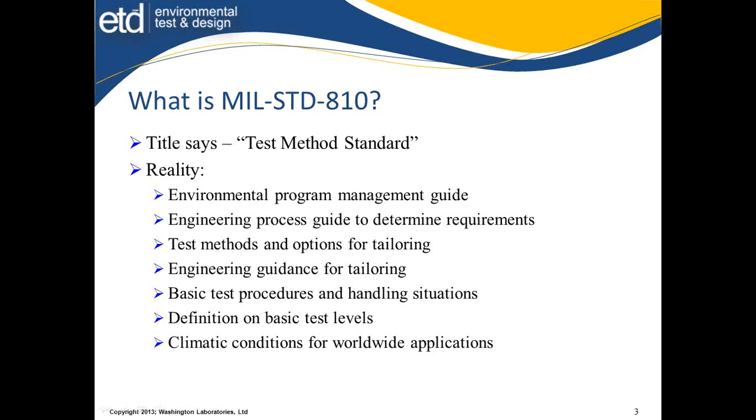The title indicates that it's a test method standard, but the reality is it's much more than that. From a program management guide to the engineering process guide needed desperately to determine the requirements, the test methods and options for tailoring, the engineering guidance, the basic test procedures and handling situations. What do we do about various things that arise during tests? The definition provided on basic test levels, and there is a guide on climatic conditions to help the developer understand what his program should do.

The environmental tasks in Part 1 are specified. Task 401 means the engineering and management plan. Develop the process - what's going to happen here, where's the life cycle, what is the overall requirements for developing a product and getting it to where it will endure the hardships of the military cycle.

The life cycle environmental profile obtains data where this is going to be. Helps us decide which tests are appropriate, without over-testing or under-testing or simply testing for the purposes of it. The life cycle plan is critical to getting product development correct.

The operational environment documentation gives a history of where this thing needs to be, what needs to happen, and that supports our environmental issues and criteria list, where the program developer decides what is appropriate - what do we need to test, what do we need to analyze, what do we need to ignore, what's associated with that.

That sponsors the detailed environmental test plan. This is the item that tells all the test labs, all the test people, what they should be doing - what limits, what profiles, what fluids, what everything should be done associated with this. This is typically one of the most lacking pieces that we get. The test lab will be asked to develop the criteria with no life cycle plan or none of the information feeding it. The standard's pretty specific about not doing things unnecessarily.

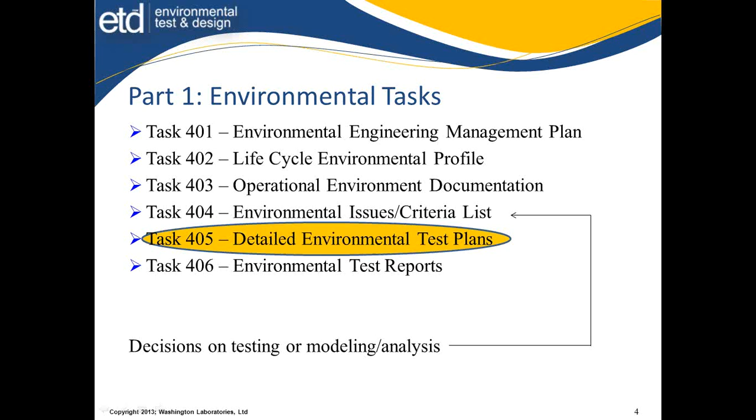There's several test methods in Mil Standard 810, as you can see by the list, from low pressure to multi-exciter and mechanical vibration for shipboard. A lot of these tests have been around for a long time, and associated with those tests, you'll have a decimal place like 500.6 or 500.5, depending on which Mil Standard revision was associated. So the decimal place helps us decide which one's in play.

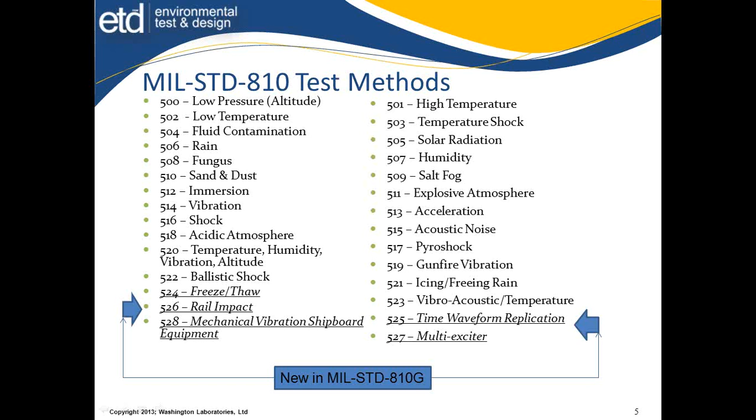We'll be going through each of these, at least a little bit, and getting an overview. As you can see down here, 5 new requirements were added to the 810G. I've identified those in italics, so you'll be able to see those as we progress through this.

Other standards come into play quite frequently: the 60068 series for the IEC, International Electrotechnical Commission; Mil Standard 883 for microcircuits; 202 for components; DO-160 has a program for commercial aircraft; and Mil Standard 167 deals with mechanical shipboard, internal and external.

But in each of these documents there's a common theme: tailoring and life cycle considerations. This always feeds through to get the right thing done, whether it be a longer endurance test or a shorter test to get a snapshot of what's going on. All of these define qualification testing. There's also attributes associated with development to help us decide how to design the product, get sample pieces, packaging material developed - things of this nature to help develop the overall program.

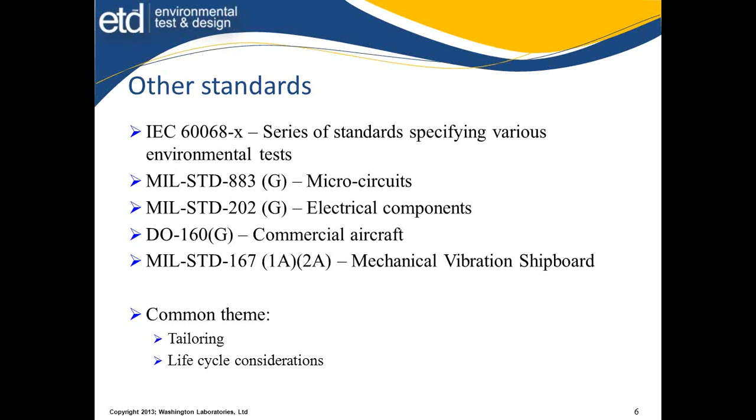Tailoring is a common theme, and we use it almost every time, whether we know it or not. The tailoring helps us develop a program based on common sense considerations, the material, applications. What are we trying to prove? What are we trying to satisfy here?

The details of the evaluation process and the method details - exactly how to proceed, what categories and extreme conditions could be encountered and how we should apply those. Obviously, there's many test methods in here and lots of options under each of the test methods, so we need to consider those kinds of aspects.

Any special conditions that would be involved. How do we configure the unit? How do we expose it? Is it a package test? Various things come into this overall tailoring process.

And a sequence - several selected methods are defined, but you need to use engineering judgment if not defined. What will happen? Here's always a problem I run into: once you tailor it, how do you get it accepted? That needs to be driven from the contract down to the testing lab versus the opposite direction. We seldom see that, but we need to see more of it, be more interactive with our customers, develop things appropriately, and they go into the acceptance of this.

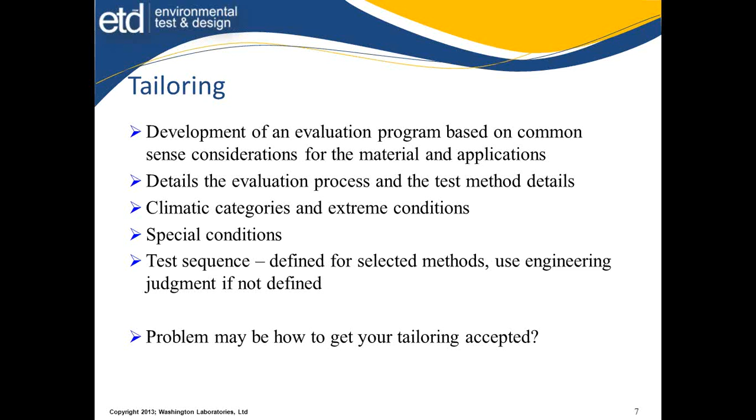A lot of contract officers and technical representatives think we're trying to shortchange the process, so they tend to be difficult to accept with tailoring. So your tailoring process needs to justify, rationalize why we're doing what we're doing versus some other method. When the specifics are not clearly defined, this becomes even more useful.

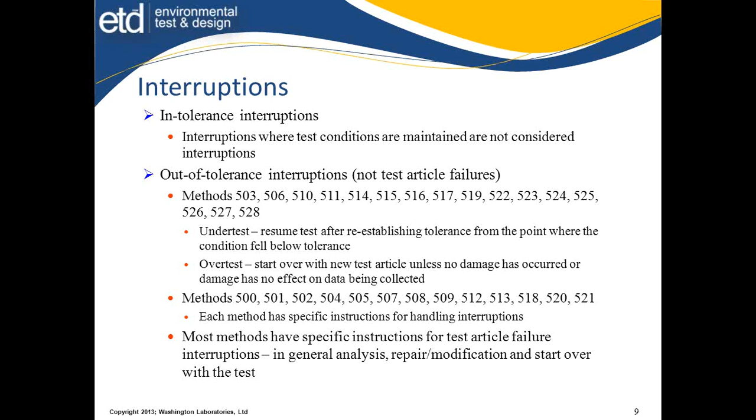If some prior test could have contributed to the failure, for instance, a thermal test may have caused an expansion, so the immersion test caused a leak. Redoing the leak test with a new product without the thermal expansion and contraction cycle may not be adequate to determine what you need to do here to repair it. You may not have a compliant article because of some other feature. So we'll make sense out of this and look at contributing factors. Analyzing why it failed is always a necessity.

Let's get into the various methods here. Method 500, low pressure, or commonly called altitude. Evaluate material that's transported or exposed to rapid or explosive decompression, carried externally, stored or used at high ground elevations. Determine which procedure needs to happen in your tailoring.

There's various procedures for the operational, transport, and exposure for rapid decompression. How fast does the change need to be? Rapid decompression could indicate various things. Usually the test duration is about an hour, but sometimes tailoring calls for longer durations for things that could be affected. What kind of test configuration do you have? Is it a shipping thing, an operating thing? What are you going to do here?

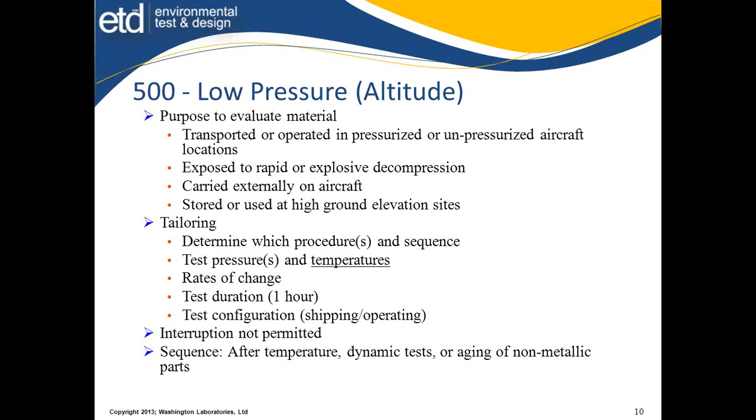So the tailoring needs to specify all these various conditions. In this case, an interruption is not permitted. The sequence should be after a temperature cycle, dynamic tests such as vibration, or the aging of non-metallic parts. Glass delamination can happen, things of this nature.

High temperature testing: evaluate surface stability, overheating, mechanical binding, failure, etc. Shortened life, you have all kinds of things that temperatures, especially high temperatures, cause. Procedures need to define for storage and operating, or they are specified for storage and operating.

And the tailoring is based on your climatic zone. Where is this deployment going to happen? Is it a hot, humid environment, a hot, dry environment, extremely cold? The test durations are defined, and you need to specify whether it's a constant or cyclic program. Most of the standard calls for some sort of cyclic program. However, constant temperature exposure at a fixed level is sometimes substituted as an operation or storage configuration, or some of both.

In a lot of cases, storage configuration is an extended period that calls for some operational checks during the period. However, storage configuration could be inside a container that prevents you from doing that. So we have to really look at how that examination happens.

Something needs to consider stabilization. How long does it take the item to get to a temperature? If there is a huge mass of material, it takes quite some time to change the temperature. So we need to consider stabilization. Most of the durations call for stabilization plus the exposure period. And again, humidity could be called out, especially if it's extremely low - humidity can affect the operation.

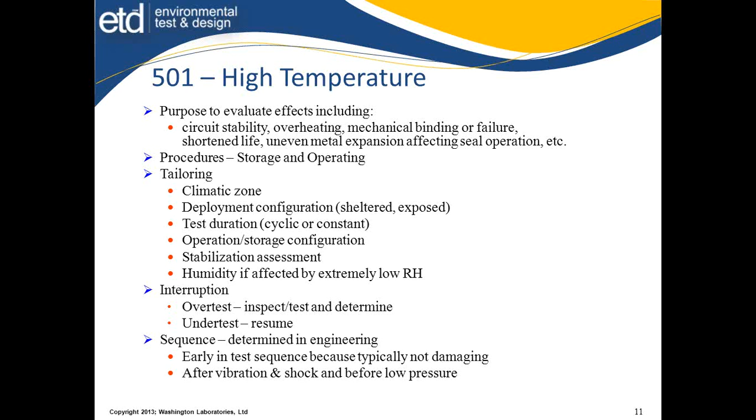Low temperature testing: again, the same kind of items happen here - performance and binding, etc., shortened life, and uneven expansion. Freezing and condensation could come into play, but there is a freeze-thaw system been added to the standard. Procedures call for storage, operating, manipulation, just like the high temperature - the climatic zone, the deployment, whether it's sheltered, exposed, durations.

And normally a constant exposure is dealt with on this particular item, whether it's operational or storage, and again, stabilization, much like before. This manipulation thing could come into play because if you have to operate switches, buttons, latches, etc., while it's extremely cold, you may need a chamber where a person can enter and wear cold weather gloves, etc., to verify they can operate. So selection of where you do the test is a function of this manipulation requirement.

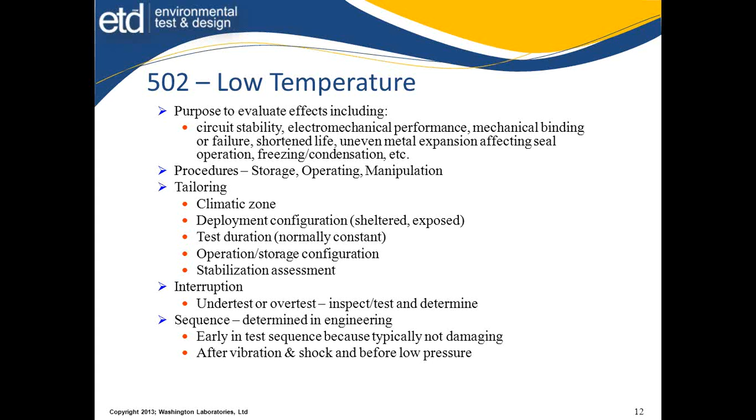Sequence is determined, but early in the test sequence is usually the case, again, after vibration shock and before altitude.

Temperature shock. Purpose, effect, sudden change. How fast is a shock? Well, if you think about items that go from a warehouse that's heated or a maintenance shop where you take items out and install on an aircraft in a cold weather climate, you can get an extreme shock at a very rapid pace.

How long to expose the item and how many shocks? Do I leave it at the temperature till it stabilizes? Usually that's the case, you need a stabilization period. But the transfer time, do we need to switch it in 1 minute, or is it just a rapid change like 10 to 15 degrees per minute? So it could be either way.

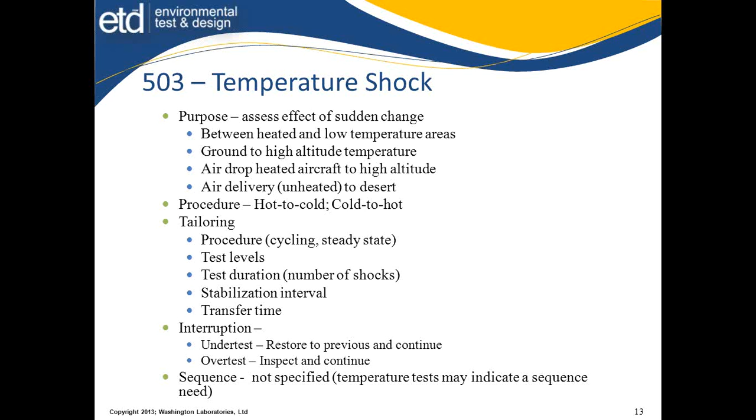Interruption of the test, restore the previous conditioning, continue the test, and you inspect it before you continue. Obviously, if the inspection is not valid, you need to worry about it. The sequence isn't specified, but normally the temperature tests indicate a sequence need. If you have cold issues or hot issues, you may need to look at that being a party to this job.

Fluid contamination. Obviously, this is the one that causes most labs the most grief because we've got to handle fluids that are not necessarily nice to handle. They have corrosions, etc., and we have to be able to dispose of those materials, etc. This also has some various procedures where you dip the item into it, spray, immerse it.

What fluids are applicable? It's almost insane when somebody says, well, the whole list, because you're talking about an extreme amount of fluids, an extreme amount of time, and the duration for these things, plus handling all those fluids. It's obviously there, but if it's never going to be exposed, why would anyone select to do these things? So we need to look at the application to make sure we're choosing the right methods, or else we severely over-test and expose products, and it's not an inexpensive proposition.

The application method needs to be determined whether it's sequential or multiple fluids exposed at the same time. Any sequence, you need to clean it between the fluids, things like that. Which sequence do we operate them in? These need to come out of that life cycle and or criteria development thing where that procedure, that plan defines what we're doing here.

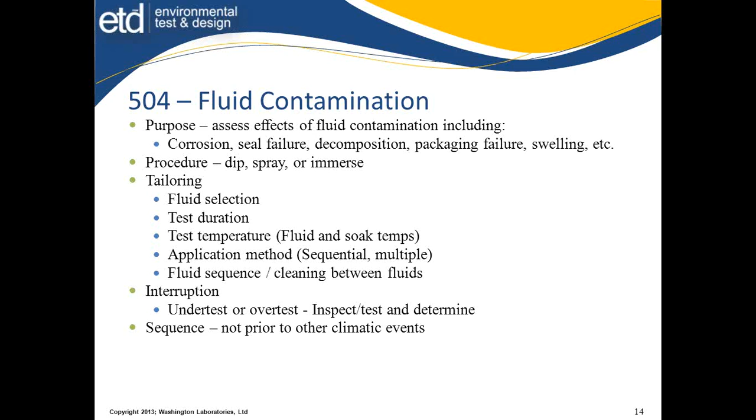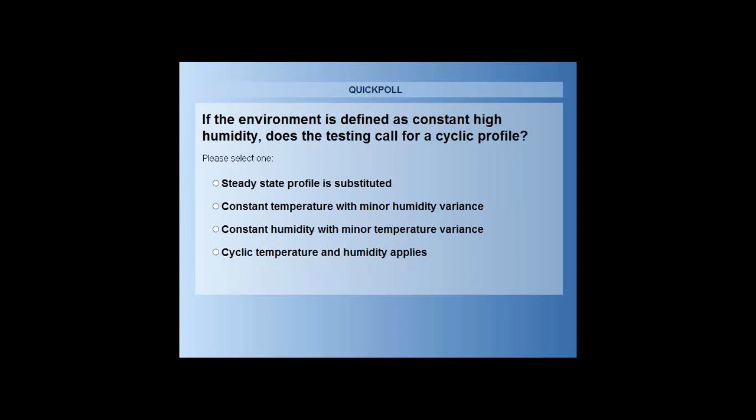Well, let me go back to that poll question. It's a good thing. It is cyclic temperature, and with a constant humidity is the normal call-out. But remember, when you're changing temperatures, you will get a variance in the humidity profile, and that's normally allowed.

So let us continue. The rain test of things outdoors encounter rain quite often, or sometimes we think it's raining inside when the humidity climbs sky high. The performance and effectiveness seals, covers, packaging, any water removal system.

If there is rain or blowing rain, water tightness or drip test applies. These could go from a high exposure with high wind rates to a dripping system, and an immersion could be included in this, though usually it's a separate immersion test. Some people feel they need to expose it totally, and immersion is the way to go.

The tailoring has to specify various things here: the rate, drop size, velocity, pressures, orientations, durations, temperatures. These have to be determined for how we're going to do the test. In the absence of this information, the standard doesn't really give good ideas, other than stating a typical drop size, and we usually go that way absent any tailoring information.

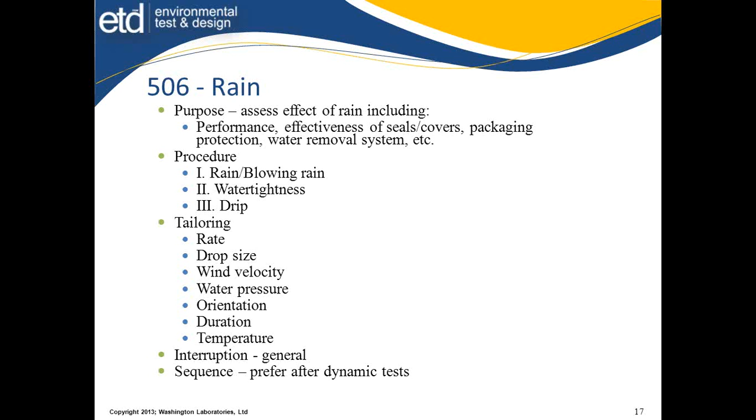The general interruption happens much like anything else: under test, resume it; over test, inspect it, and decide whether you're going forward with that article or not. The sequence preference is after dynamic test, to see if we've shaken open holes, things became loose, etc.

Humidity exposure purpose is warm humidity environment, corrosion deposits, delamination, fogging, you name it that could go wrong. The temperature and humidity needs to be specified, with 5 48-hour cycles as the normal, so 10 days of exposure. Inspection intervals could occur during the process, usually at cycle 5 and cycle 10, but others could be used.

We had a program recently that had an evaluation every day. Operation periods and performance checks: some aggravated cycle calls for these checks at the 5th and 10th. Interruption: the under test resumes from the end of the last completed cycle. Over test: inspect, test, and determine whether to go forward or not.

The sequence should consider the effects on subsequent tests, but do not do this one after the salt fog, sand and dust, or fungus testing, as they will affect the results of these items.

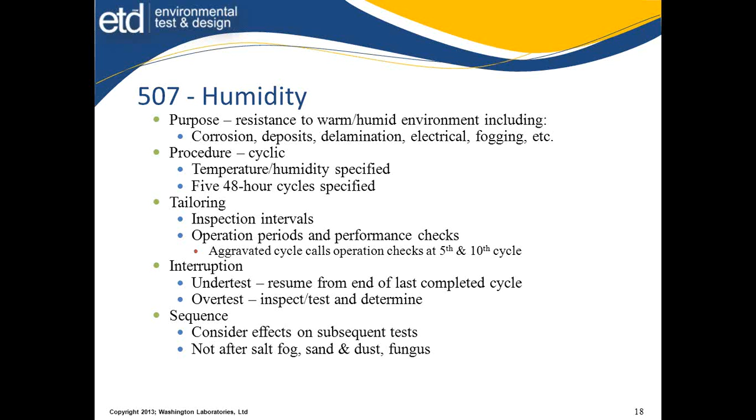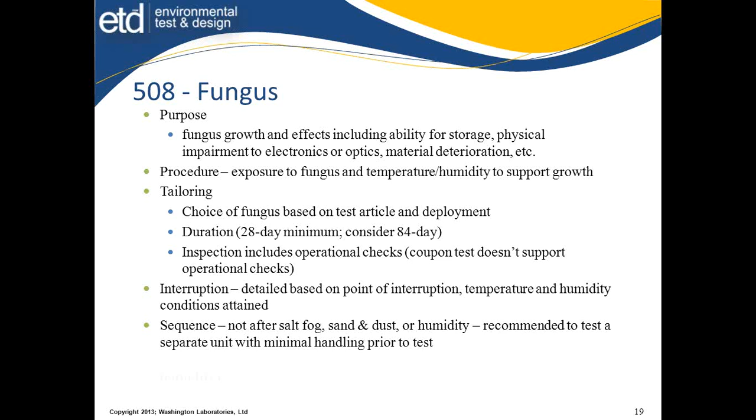The salt fog test happens for a lot of the shipboard activities and things near coastal regions. The procedure calls for alternate fogging and drying cycles.

Tailoring: do you really need to do the test? That's been one of the common questions. The standard calls for 48-hour exposure followed by 48 hours of drying. However, the more realistic test calls for a 24-hour exposure, then 24 hours of drying, with 2 exposures alternating. That's what most people call for, though the standard still says 48 hours exposure with 48 hours of drying.

The temperatures, the salt fog fallout rate, and storage conditions need to be defined if different from the standard. These tests are pretty well commonly known and straightforward, so there's not a lot of tailoring other than high exposure times. Under test or over test, inspect and determine whether to proceed or not. Sequence is not specified in its effects, but assess the effects of other tests, especially after fungus and humidity.

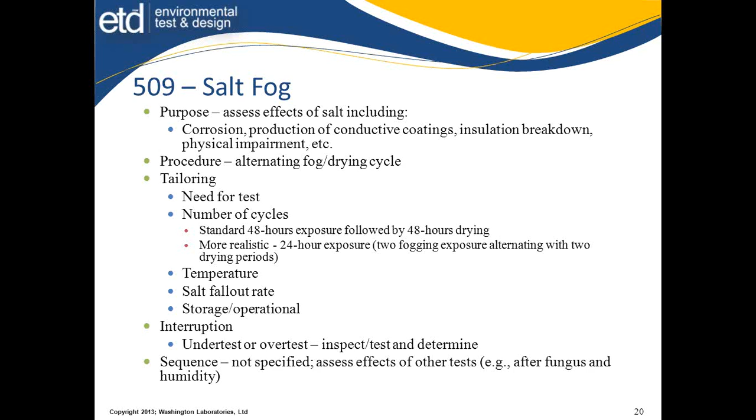These tests call for an in-depth inspection, so taking the unit apart and seeing if we've had salt penetrate into the unit, etc., is part of the overall job. So when considering how long you're going to take to do this, consider that inspection could be somewhat lengthy.

You also have the test article configuration that has to be defined, temperature, humidity. The duration is typically a dust is 6 hours plus 6 hours of an elevated temperature, and the sand is 6 hours. You may have exposed sides, so the orientation could come into play here.

You need to operate during test. It's always a challenge to operate a generator, for instance, during the sand exposure, and you're pulling in air with the sand, and it tends to clog everything up. But the filters may need to be reestablished and continue. Over test, remove the excess, and resume.

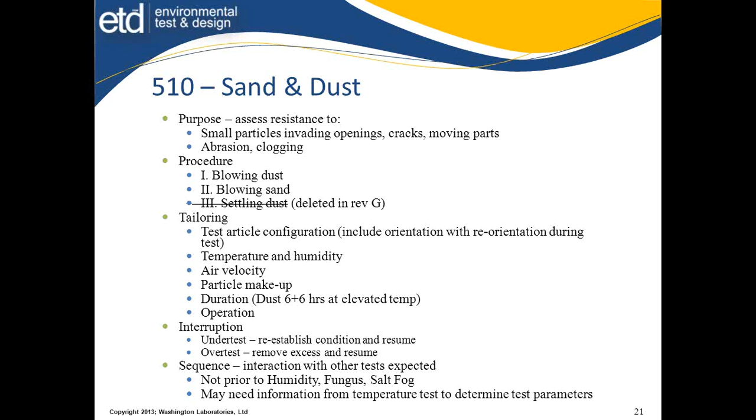Sequence interaction with other tests are expected, so not prior to humidity, fungus, or salt. You may need some information from temperature testing to determine some parameters. So this is one of those that you may have to get a result on one test before you decide how to do the next test. This is one of those.

Explosive atmosphere. Purpose is to test ability to operate without ignition of fuel air atmosphere. The tailoring is applicable. What's the fuel vapor mixture, any temperatures? Does the item get hot to ignite the mixture, or is it simply from arcs from unsealed switches and contacts that may change?

Humidity needs to be determined. The altitude, a max of 40,000 feet. Just today, we had a client specify 52,000 feet altitude. There's no air there to make this mixture happen. You're not going to support flame and ignition.

So how do we call for it? Interruption, you purge your chamber and reinitiate the test and basically start all over again. And you need to perform temperature and vibration shock tests first, because that may expose cracks and openings that would allow the mixture to ignite.

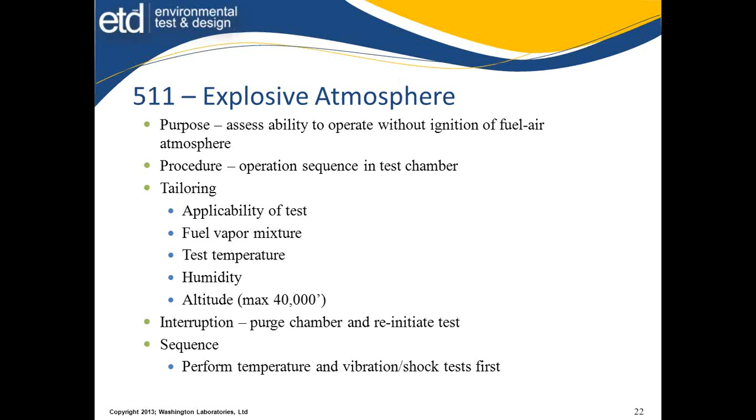Immersion. The purpose is to look at electrical impairment, corrosion, explosive deterioration, engine operation, etc., associated with immersion or fording. Some things need to be underwater for a period of time, others are like stream fording. The depth of the immersion for fording or fording conditions need to be defined.

Typically, a 1 meter depth is called out for a lot of products for general applications, but some things call for operation at various depths. A 20 meter immersion is not out of the question. They may need to operate at 20 meters immersion, so that's kind of a difficult test to get a dunk tube at 20 meters tall. Most of the time we go to some sort of lakes or things like that.

Test configuration is packaged, operational, or protected, and the duration, typically a 30-minute immersion. This preconditioned temperature a lot of times calls for you to elevate the temperature of the article 10 degrees above the water temperature prior to immersion. So it gives a chance for the sudden cooling and pulling in of the water or the moisture.

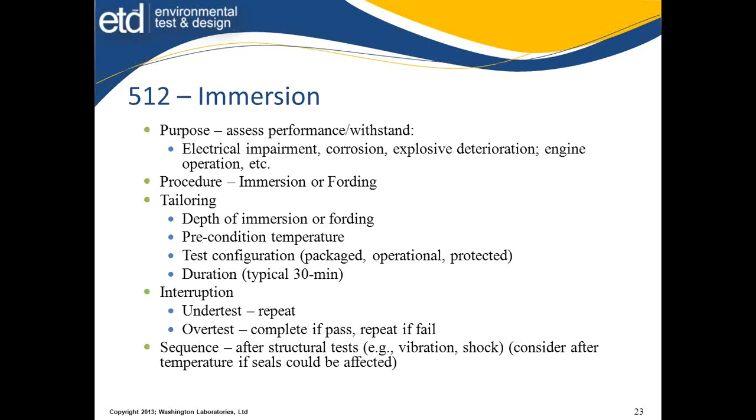After structural test, vibration and shock is a sequence. Consider after temperature if any seals could be affected.

Acceleration. Purpose is to perform, withstand the inertia associated with acceleration and deceleration and maneuver forces. Structural, operational, crash safety. The tailoring gets to be defined for applicable procedures, the levels, orientation requirements, etc.

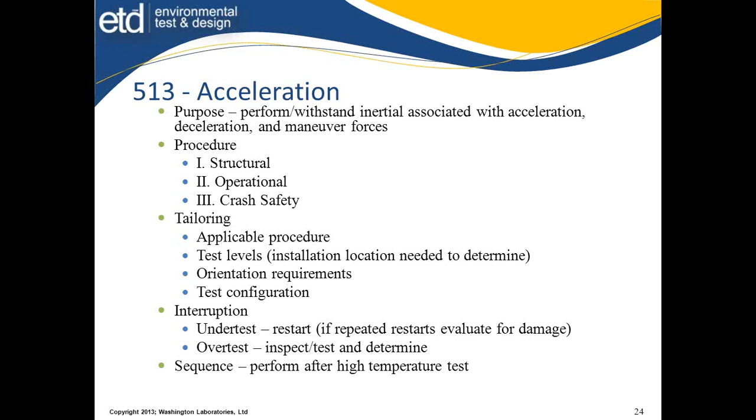Crash safety says that I absolutely have to have the mounting structure as it would be installed, or else I don't evaluate its ability to hold on to that structure or the structure to retain it in case of a crash event. And an under test is restarted and inspected if you over test. After high temperature tests is the most common place to put this thing.

Vibration. The procedures are big. There's 4 general procedures associated with vibration. However, there's 25 categories to select from and 8 type tests such as development, functional, qualification, etc. Vibration characterization, the article configuration.

How are you going to mount this thing? Are you trying to look at how it stays together? Or are there going to be fixture adaptations that says I'm going to dampen the vibration? So doing a test on a box that you clamp to a table, the shaker, is not necessarily evaluating its mounting structure or what happens.

You could get a significant profile variance on the item inside because you don't mount it on a structure that would provide a resonance or a dampening of the vibration. So sometimes a clamp down method is artificial, but it's used commonly to evaluate what goes inside in what they consider to be a worst case event. However, it may not define that if I've got mounting that causes a resonance at a frequency because of the mounting structure.

This requires a lot of detail on configuring the test article and the tailoring. How is it going to be evaluated? What's the purpose, under test, over test, pretty well defined. Resume where you fixed it.

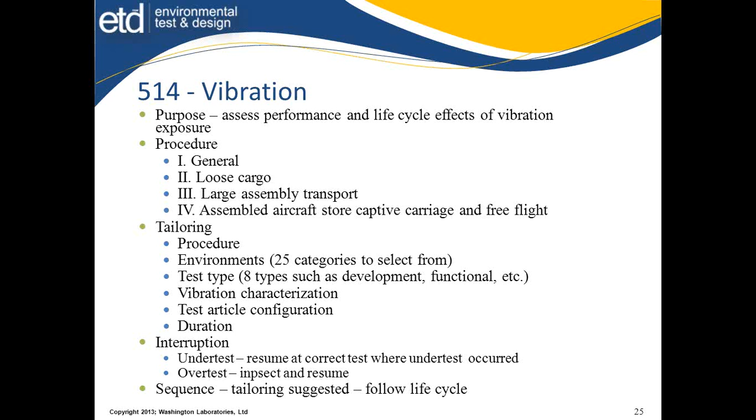Tailoring is suggested, but generally follow the life cycle. Vibration is a tailoring process. It's not common, but I had one product that had been qualified using the wrong profile, and when we put the right profile in it, the metal seams of the chassis broke apart because of the propeller frequency of an aircraft.

So we need to look at really tailoring this thing and look at its environment. Acoustic noise comes into play for limited applications where you get high noise hitting the test article. Grazing incidence, some acoustic noise, the diffused field, cavity resonances could occur. Again, applicable procedure if it's appropriate. You need this life cycle plan to identify it, if it's not going there.

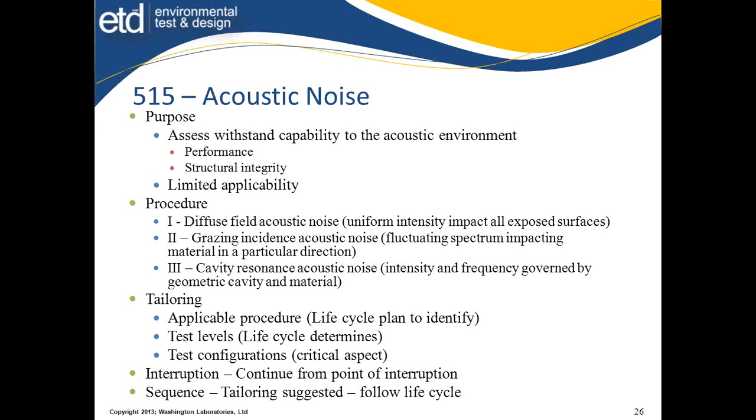8 procedures, and it excludes some things here that we touch on with other things. It does include drop testing. This always frustrates a lot of people getting their product qualified because we're going to drop it on solid surfaces and damage it. They don't like to see the thing damaged during tests, but that's the typical way to get the evaluation.

Sometimes procedures call for going on a shaker table, and is it a waveform that's a sawtooth, a half sine, a trapezoid? How long is the duration of the pulse? Shock also gets into some time waveform replication, a new standard that was added, and we'll get to that as we go towards the end.

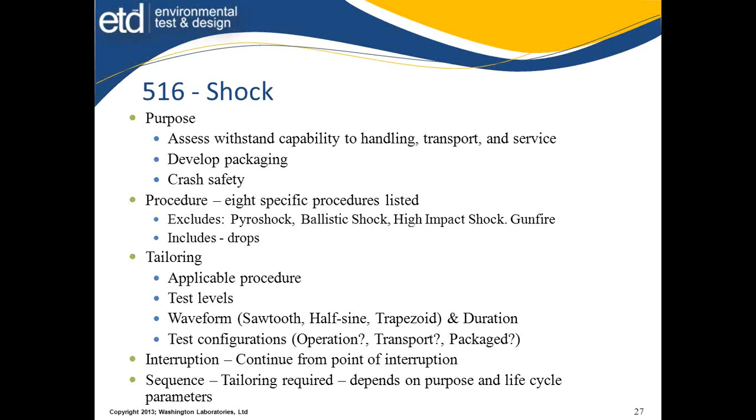Interruption is continued from the point of interruption. Sequence tailoring is required, depends on the purpose, life cycle parameters. And you're seeing a trend here also, life cycle parameters come into play more frequently than we like to admit. Pyroshock, detonation from pyrotechnic devices, mounting structures for explosive ordnance, things of this nature.

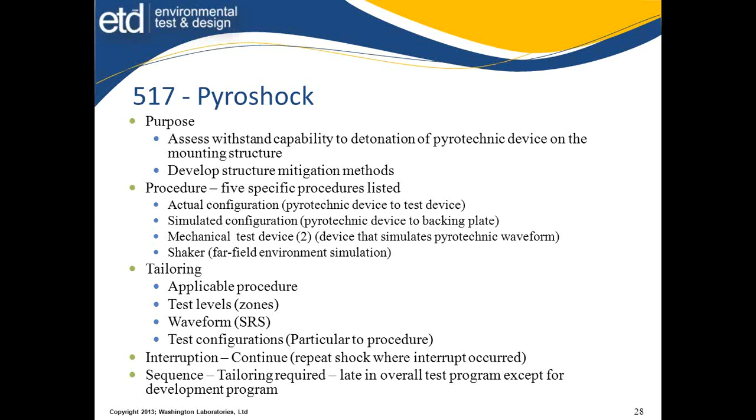5 specific methods are listed and they're stated there. Again, the tailoring is really critical. Applicable procedural levels, what zones are you in? What's the shock response spectrum on the waveform? The test configuration is usually particular to the procedure. You need to follow the procedure, the configuration of the actual event, to be able to tailor this shock event correctly. Tailoring is required. It's usually late in the overall program unless you're developing the structure.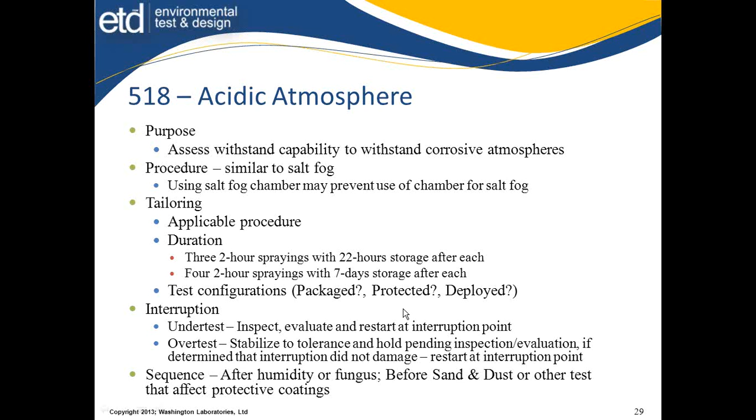Test configuration, got to define what's going on there. Interruption, inspect and evaluate in all cases. Overtest, stabilize it and hold it pending evaluation. Determine interruption, do not damage it, restart where you did. After humidity or fungus, before sand and dust, or anything else that affects the protective coatings.

Gunfire shock, those things that are placed on automatic weapons or nearby them where the shock of the explosion or weapon causes issues. Again, sometimes this reproduction of a measured time trace, the method 525, comes into play. Stochastically generated measured time trace information or predicted input.

Tailoring, the applicable procedures, any control options, how are we going to control the shock event and feedback from that. Where do we place an accelerometer to get a control point that we're going to accept that it's at the right level? The test levels are usually location determined based on the installation, so we don't know how to do the test level without guidance. The test duration is calculated based on the life cycle and any configurations. Again, the fixture becomes critical to determine how this affects things.

Interruption, reinitiate from the test being conducted. Component failure, replace it and start all over. Sequence is tailoring suggested with guidance, but generally after vibration and shock and before climatic tests.

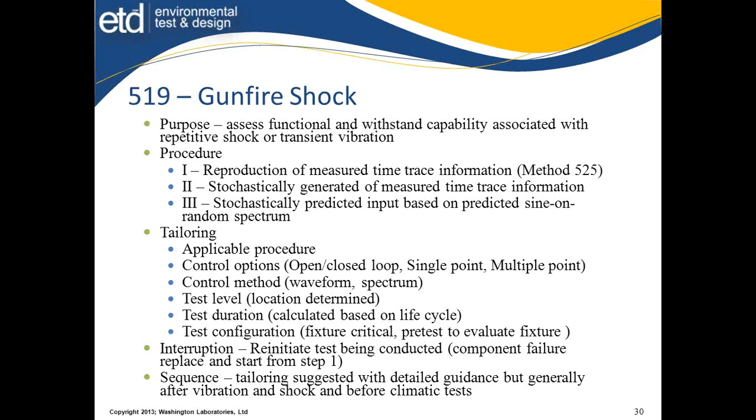Temperature, humidity, vibe, and altitude. People look at this as all things combined, but normally it's some combination of those things, like vibration and temperature, humidity, temperature, altitude, humidity and temperature. And it doesn't replace the individual methods, even though a lot of folks said, why am I doing both? It wasn't intended to replace them. The procedures for engineering development, flight or operational support, any qualification, tailoring, the definition needs to be there. Quite frankly, the most common thing we see is temperature and vibration together.

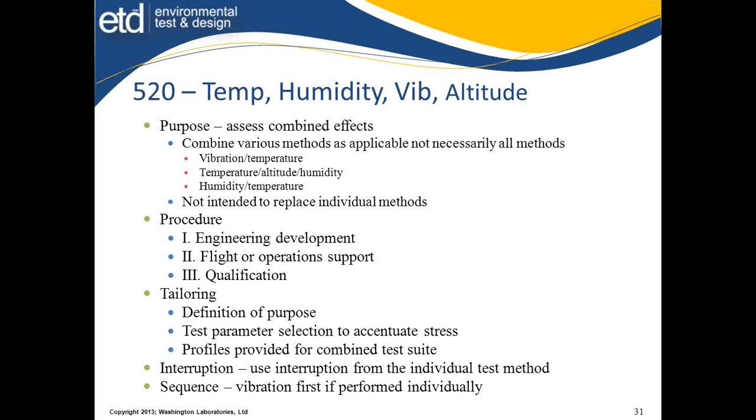Icing and freezing rain, evaluate effects on operations. Ice accumulation could be on defined sides to a specific thickness. Exposure, which sides are exposed, is a tailoring process. How much accumulation? Do I need to do it for shipping? Operational during ice? Do I need to start the test after accumulation if it's an operational test? Sometimes flat antennas, the dome antennas get an ice accumulation buildup. So we might need to evaluate the antenna operation after the ice is acquired, especially those with embedded amplifiers, etc.

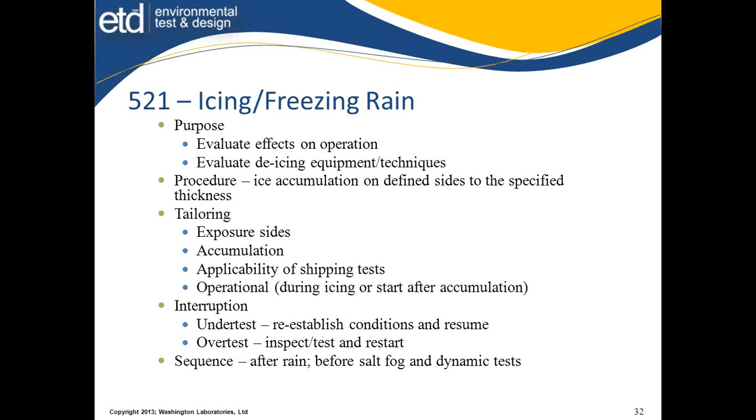Interruption under test, reestablish and resume. Over test, inspect it, check to see where you can go. After rain, before salt fog, and dynamic tests.

Ballistic shock comes into the momentum exchange between bodies, or between a liquid or gas and a solid. Six procedures are called out, but they call out a specific shock apparatus depending on the severity and mass. Each procedure calls for a specific approach, so we have to really customize this thing. Sometimes a custom test fixture is required to support the testing.

Operational requirements need to be specified because normally it's a single event that happens. Interruption, reestablish it and redo it, over test, inspect it. The sequence is not specified, but you have to consider there's potential damage.

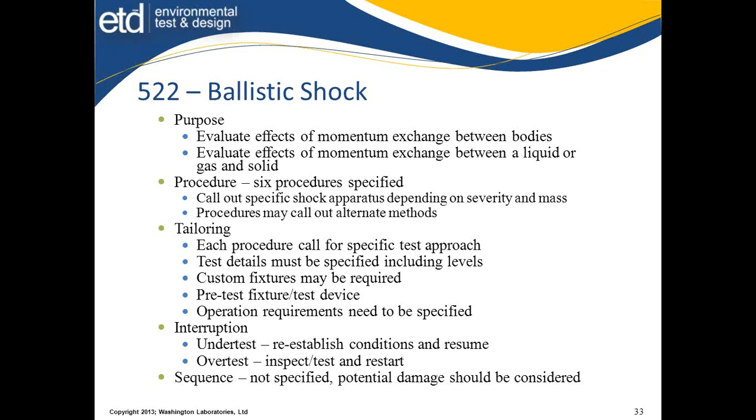Vibroacoustic and temperature involves the acoustic items along with temperatures on externally carried aircraft stores. So things that are not external, this doesn't apply. We need to consider that in your overall planning purposes. Several tailoring items need to be identified, from temperatures to acoustic levels, exposure sides, accumulation of the events, operational during icing. Excuse me, that's an error in the slide. That icing is not associated here.

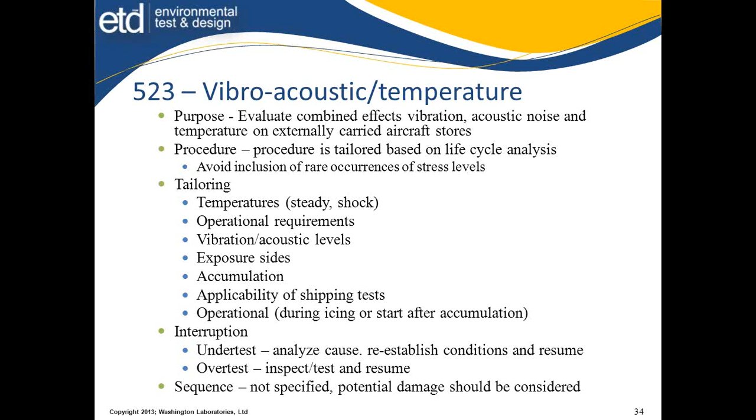Interruption, analyze the cause and reestablish operations, inspect, test, and resume if you're going to overtest. Sequence is not specified, again, potential damage considered.

Freeze-thaw: effects of liquid to solid change on the materials, effects on the moisture by climatic change. Three procedures are called out: transfers from fogging or a diurnal cycle, rapid exchanges. Tailoring needs to be brought forward is what's the configuration, ranges, stabilization, do you use moisture spray, do you use a misting, do you spray it and acquire it? How many cycles need to go from the freeze and thaw cycles?

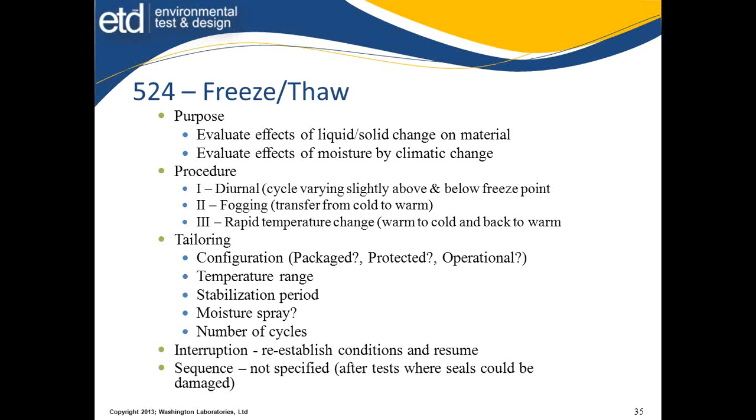Interruption, reestablish conditions and resume it. Sequence is not called out, but look for places where seals could be damaged.

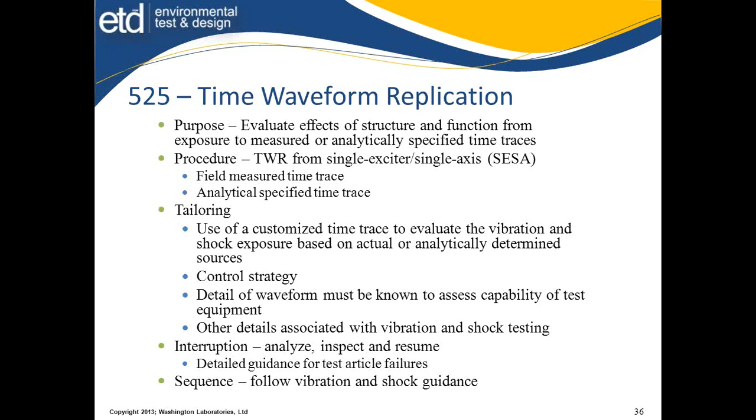Follow the guidance for any test article failures. After vibration and normal shock is a sequence. So the time waveform replication will be coming forward, I'm sure, as time goes on. That means everybody with these vibration systems and shakers that do these things needs software that will support the time waveform replication in the near future.

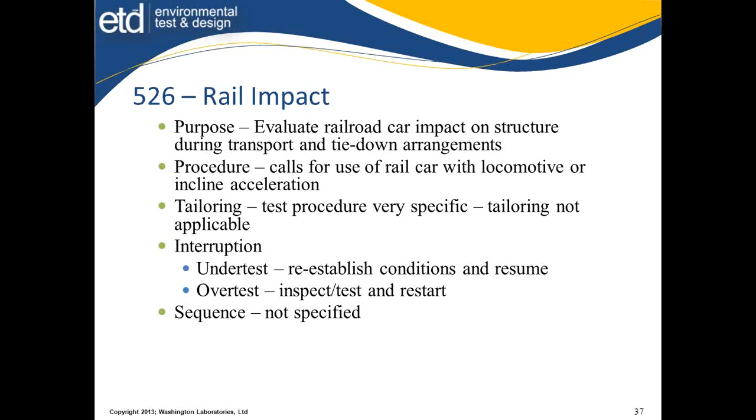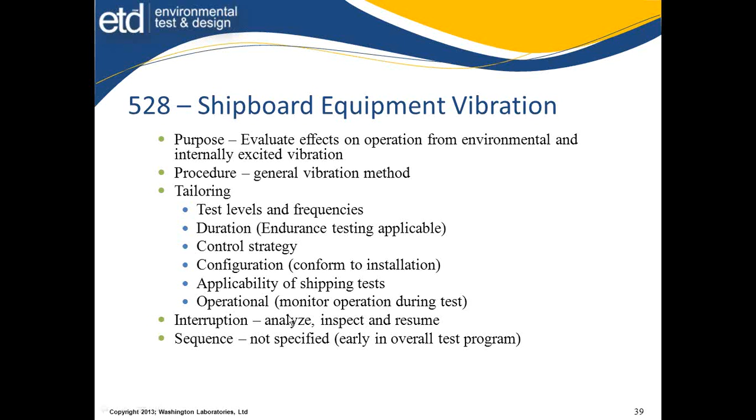Sequence follows vibration and shock guidance. Shipboard equipment vibration deals with internal generated exciters and environmental things. There are two different sections of this. The tailoring, much like we've always had, covers test levels, duration, any control items, whether to monitor operation, things of this nature. Interruption, inspect it, and resume it if you're allowed to. Sequence is not really specified, but it's early in the overall test program.

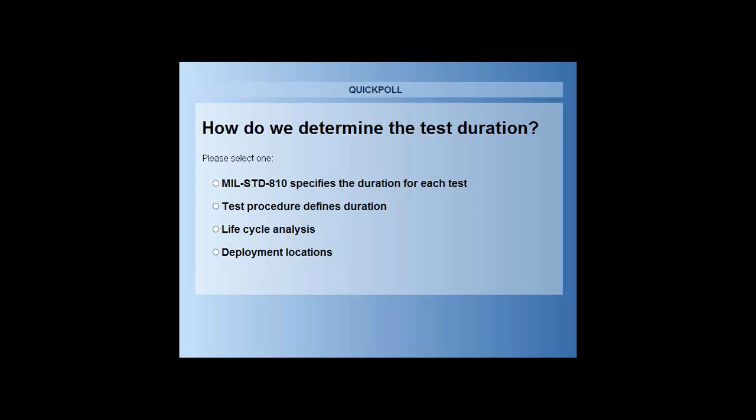We have about 40% said test procedure defines duration, and around 40% also said life cycle analysis. Well, I've got to consider that both those 40% have some merit. The life cycle determines what goes in the procedure. The procedure should contain that information so you can evaluate it.